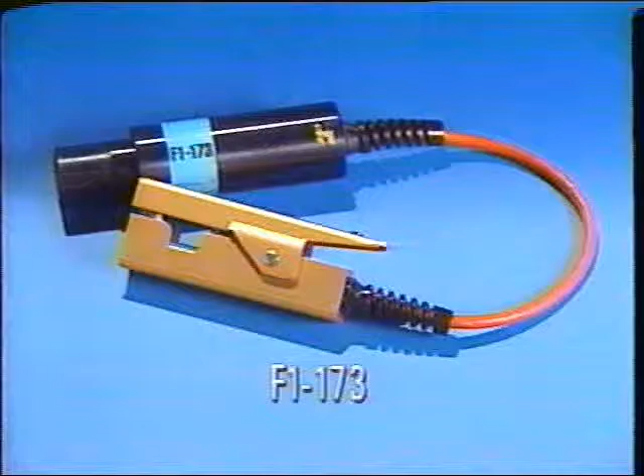3 more adapters will be included with the 13.0 monthly updates. They include the B592 oxygen sensor and throttle position adapter plug, the F1173 dual output for tachometer and distributorless ignition cylinder identification, and D3175 and 176 port 1 and 2 shorting adapters.

A concern is developed in conjunction with the Release 12.5 upgrade that has been installed on your SBDS. The upgrade is incompatible with certain past model vehicles and damage will occur to your SBDS if connected to the self-test connector on these vehicles.

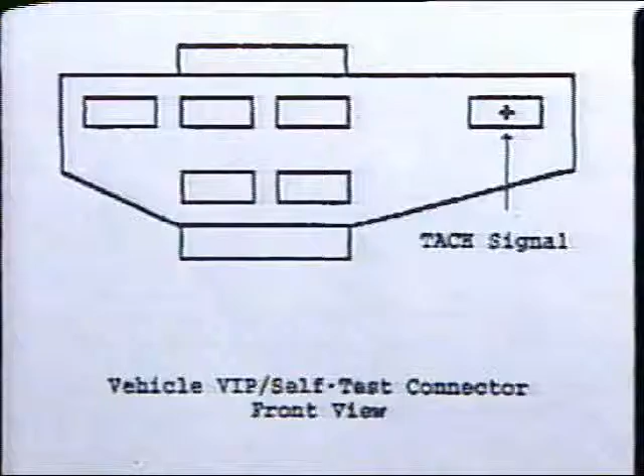1985 and earlier vehicles have a high probability of this problem and should not be connected to SBDS. As a temporary solution, remove and insulate the tach wire from the self-test connector on the affected vehicles. As a further precaution, refer to your latest SBDS tool coverage chart.

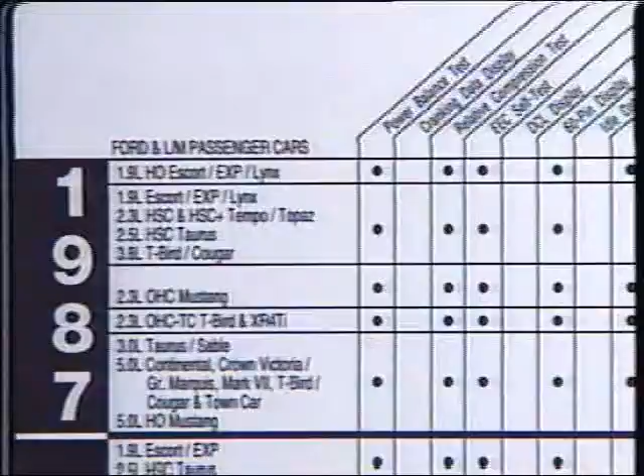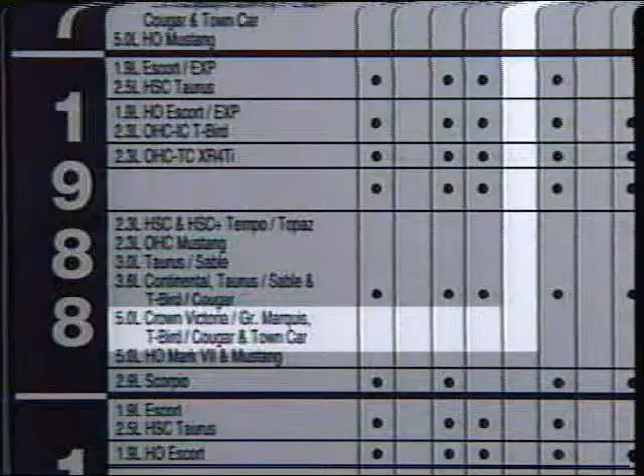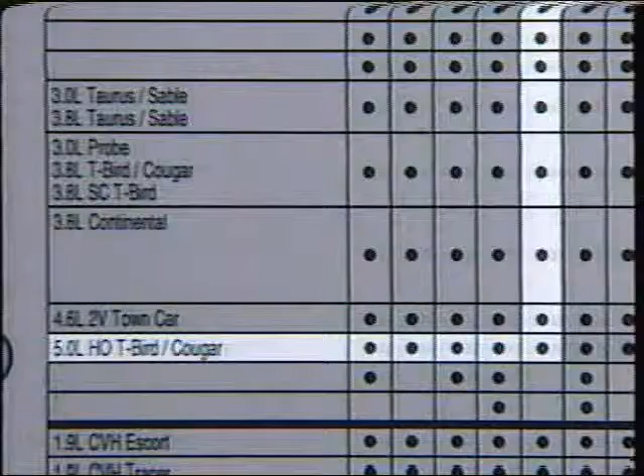If the vehicle you wish to test is not listed or does not have DCL display coverage, like this 1988 5-liter Thunderbird, check the self-test connector for a tach lead. If there is a tach lead, remove and insulate it before connecting to the SBDS. Vehicles with DCL display coverage, like this '91 5.0 T-Bird, will require no modification to the self-test or data link connector.

A long-term solution is under investigation. More information will be released as it becomes available.

The new main menu has replaced the vehicle entry button with a body chassis electrical toolbox button. This button is grayed out or not operational at this time, but will be available for future updates.

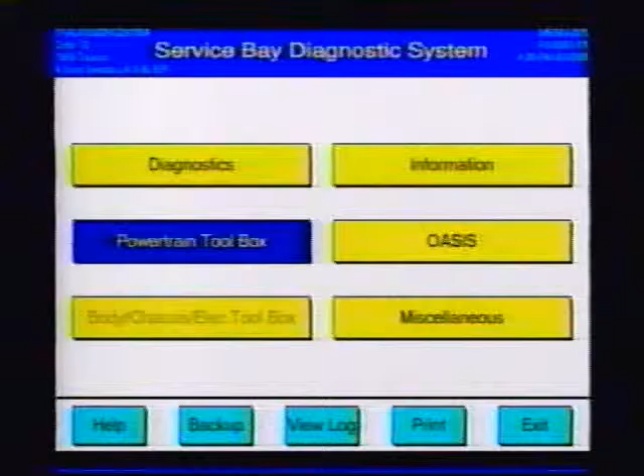If we select Diagnostics or OASIS or Powertrain Toolbox, that is any function that is VIN-driven, we will access a vehicle entry screen. Here we can just touch Continue if the vehicle we want is in the active area, check past VINs to see if the vehicle is in the vehicle file, or type in a new VIN.

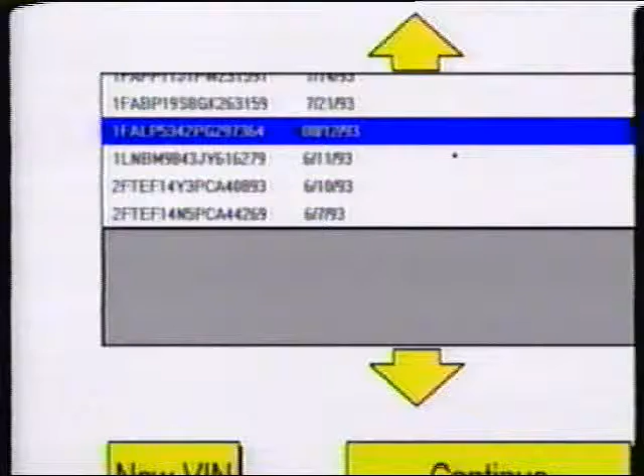Let's look at past VINs. The vehicle selection file can now hold up to 100 vehicle identification numbers, which will stay in the file for 7 days. After 7 days, SBDS will automatically remove the VIN and the associated vehicle log.

If we need to save a VIN in a log for a longer period of time, we'll touch hold and the VIN will now stay until manually removed. If we touch remove for a VIN on hold, we get a removal confirmation screen. Let's touch no. If our VIN is in the scroll box, we can touch continue to proceed.

If not, let's touch new VIN. If there's a VIN or mileage showing, touch clear. This will not remove the VIN from the vehicle file, it just clears the boxes so a new VIN can be entered. Type in the new VIN and mileage. Now let's continue.

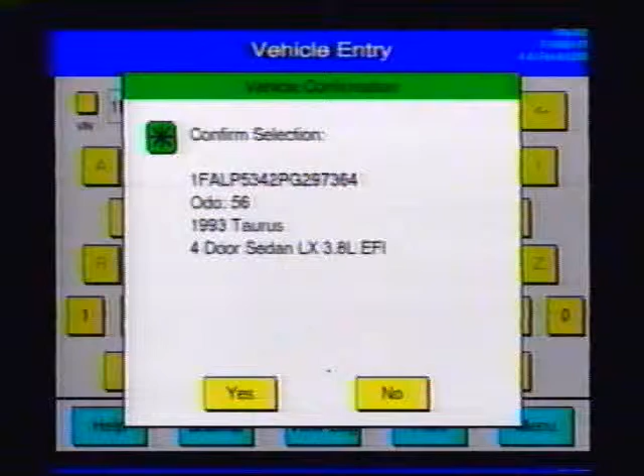Here's the vehicle confirmation screen. We'll touch yes to proceed to the powertrain toolbox. Let's go to a power balance test.

Some hookup screens now look like this, with a schematic instead of text. Help looks different too. In addition to the original 6 help modules, we can now go to the information module from any help menu and access service manuals, calibrations, broadcast messages, technical service bulletins, users information, EVTMs, or even recalls and owner notifications. Let's touch menu, and we're back at the help menu.

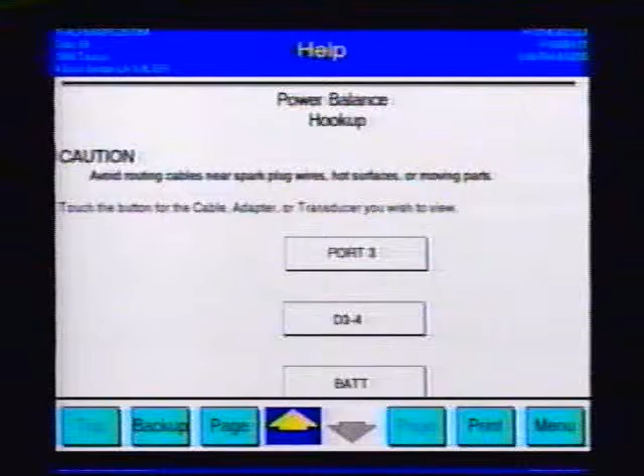Let's select hookup. It now shows descriptions of the cables and adapters shown in the hookup schematic. We've selected battery. This tells us all about the battery cable.

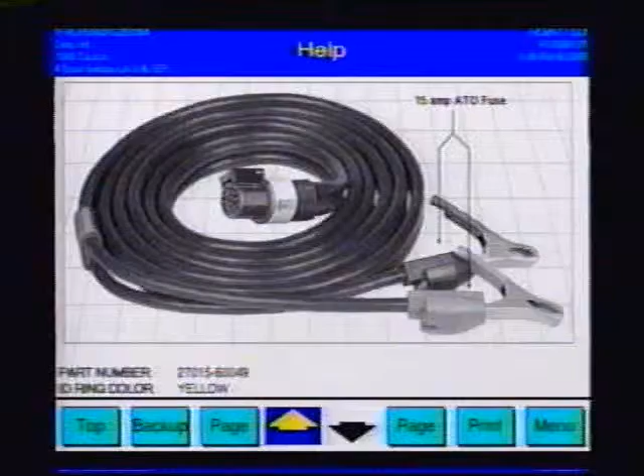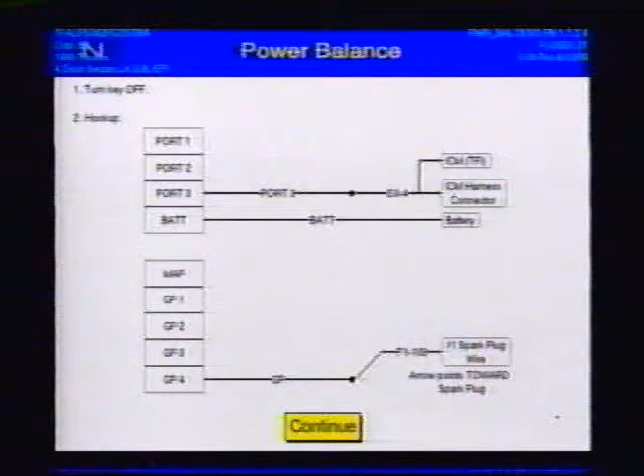Pressing the menu button takes us back to the help menu, and exit returns us to where we were when we entered help. Continue takes us to this screen. This note was in a recent newsletter and improves the dependability of power balance. We can continue from the screen or from the pendant. We'll find several tools now allow continue from the pendant.

EEC4 tests in 13.0 are essentially the same as previous software levels. So let's return to the main menu and select another VIN.

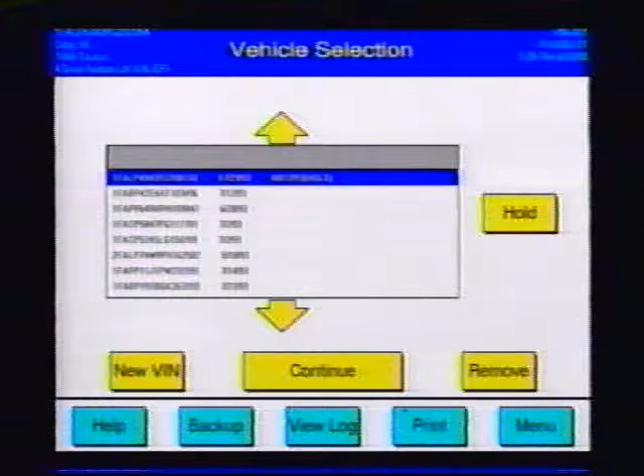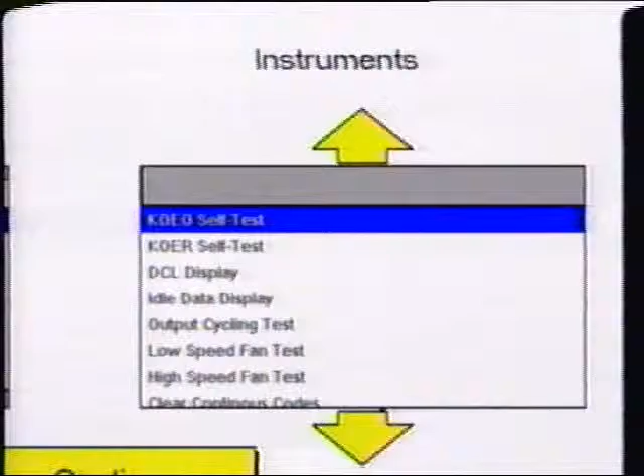This one is a 94 that's in the vehicle selection file. We'll touch yes on the confirmation screen. The toolbox category, electronic engine control instruments, looks familiar except for one new item, PCM reprogramming. We'll come back to this in a few minutes. For now, let's select key on engine off self-test.

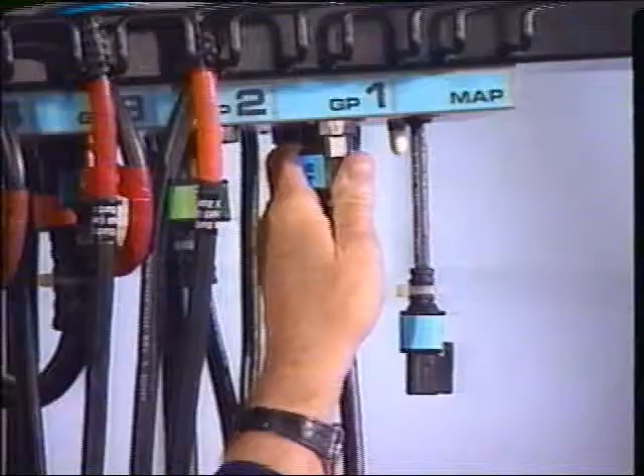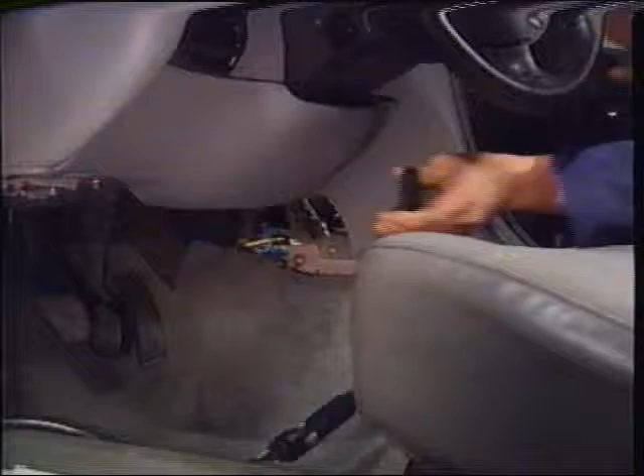We're going to use some of our new 13.0 hardware. First, connect the GPC cable to the boom. Then connect the D373 adapter to the GPC cable. The D373 adapter then connects to the new EEC5 test connector, now located under the instrument panel. This connector conforms to SAE standard J1962, required for OBD2 vehicles.

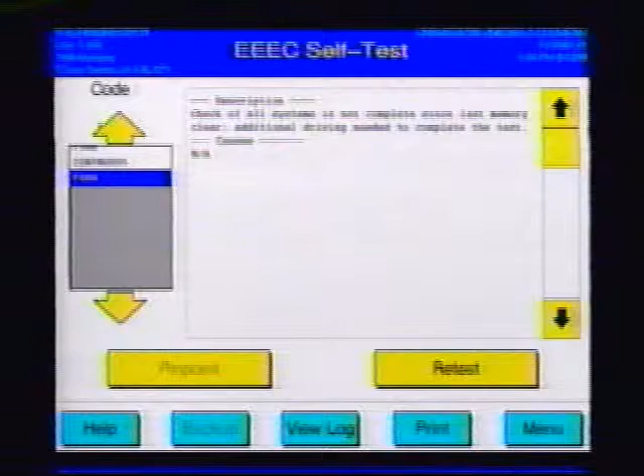We'll turn the key on and continue from the pendant. The code outputs are in the same format as the EEC4. Of course, we use the new 5-digit codes. The P1000 code indicates that a fault is not detected, but all of the OBD2 monitors have not yet been tested. An appropriate drive cycle is required to clear this code.

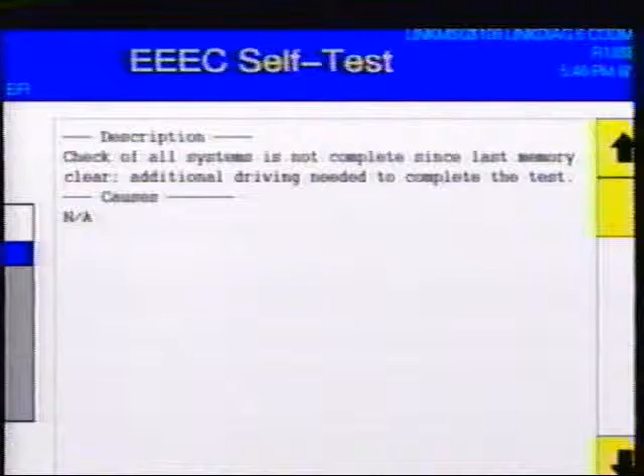Let's return to the powertrain menu and take a look at the new electronic engine control instrument called Powertrain Control Module Reprogramming. We expect this feature will be available on the 13.02 monthly update. The PCM reprogramming tool lets you reprogram the 104-pin EEC5 with an updated calibration. This is done through the data link connector between SBDS and the vehicle. The PCM remains in the vehicle during reprogramming. This tool is used with EEC5 vehicles only.

When we touch Continue, SBDS displays applicable TSBs and recalls, if any exist, for our vehicle. We will proceed only after completing any replacements or repairs called for.

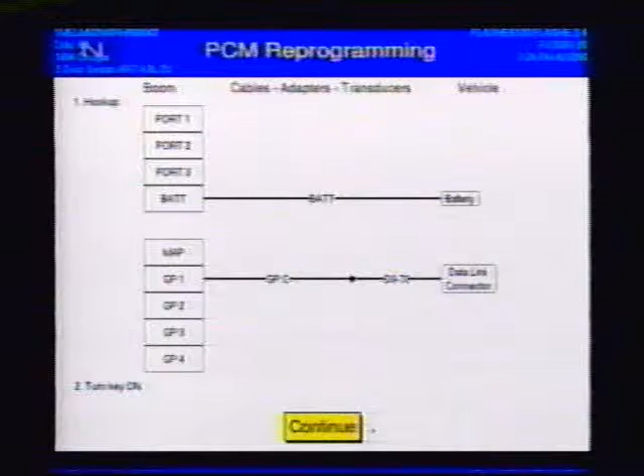We'll follow the hookup instructions and touch Continue. This screen instructs us to remove the regular CD from the drive and install the Calibration Update CD. The Calibration Update CDs will be included as necessary with your monthly update. The timer is displayed during the reprogramming process. After reprogramming, SBDS displays the information necessary to complete the authorized modification label. SBDS then conducts a self-test and automatically prints the vehicle log file.

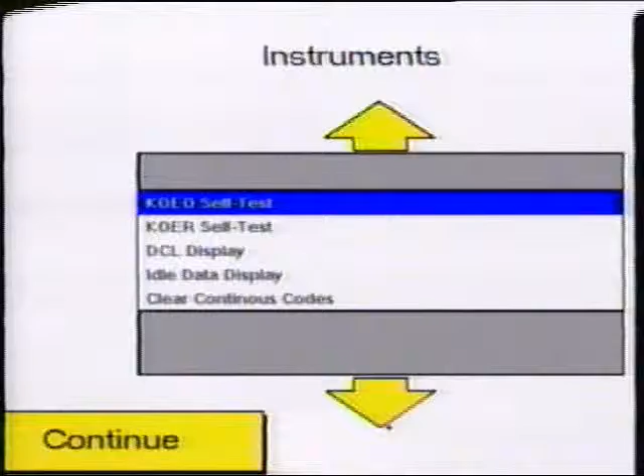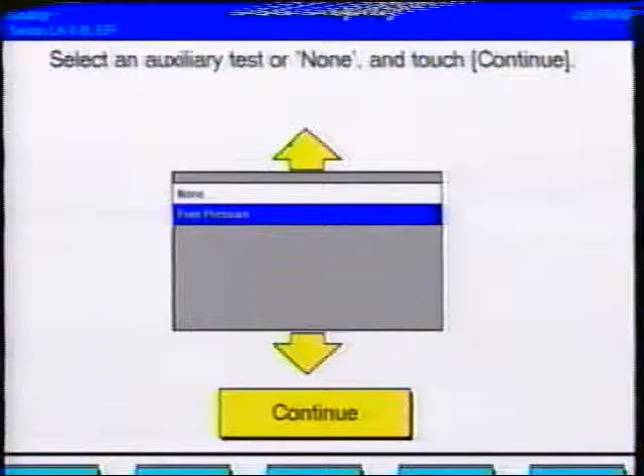Back at the Instruments menu, we select DCL Display. We now have the option of selecting auxiliary tests in DCL Display. Let's add fuel pressure and continue. Follow the hookup screen schematic and continue. This looks familiar. Let's select Table.

The Parameter Select screen has some new acronyms. Also, our update time is faster on both EEC4 and EEC5 systems. The continuous code counter will indicate the number of times an intermittent code has occurred.

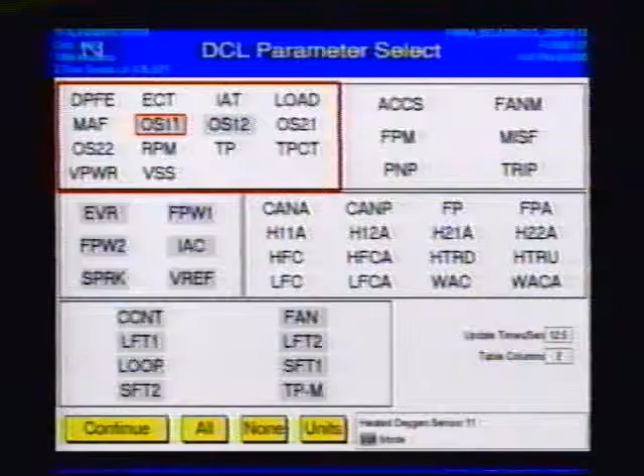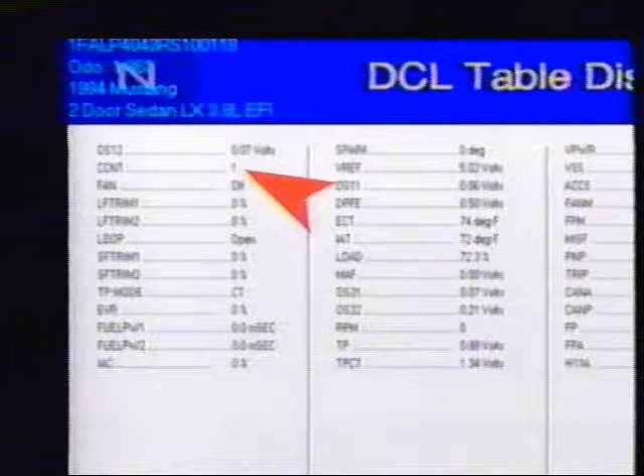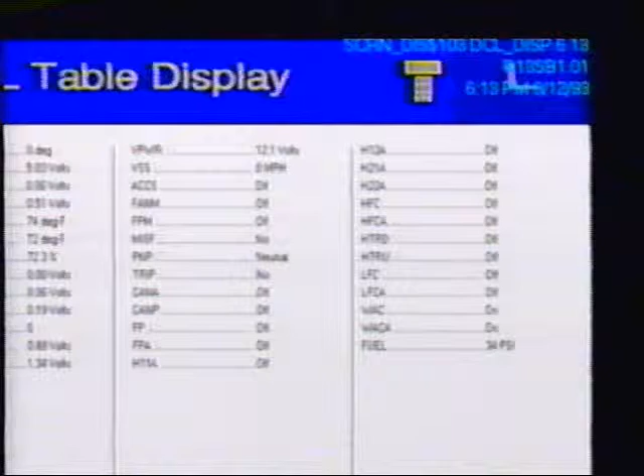Let's look at all the parameters. We see lots of new items. Here's the fuel pressure we selected. Our continuous code counter said we've had one intermittent since the codes were cleared. Up here, we see an L superimposed. This is a new log button that we'll see on certain 13.0 screens. There's also a road test button, so we can go directly to DCL Recorder and Monitor.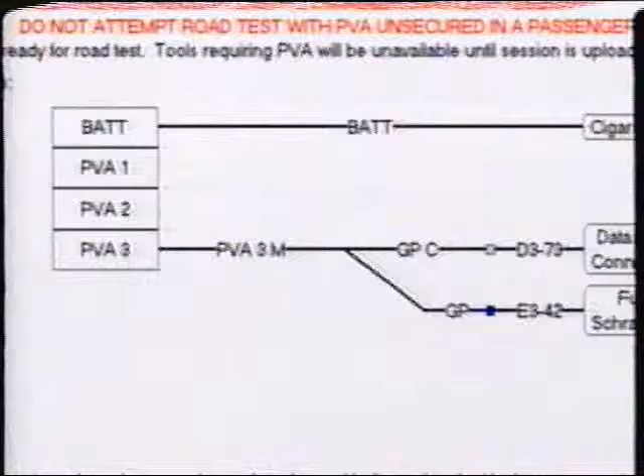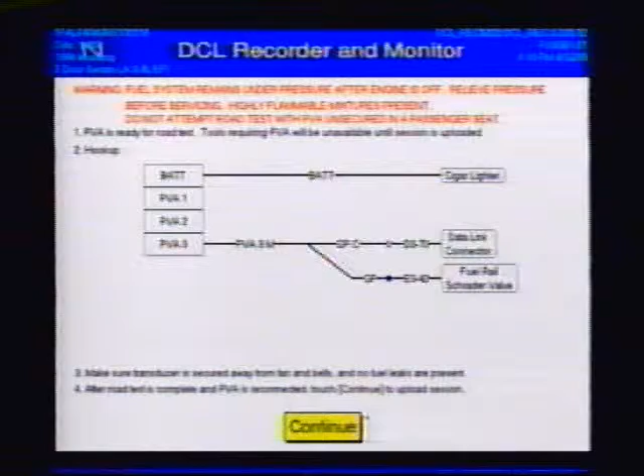The items we've selected will be automatically downloaded to the PVA, and we'll get a new road test hookup screen. Notice that we'll be using the new PVA 3M mini road test cable. DCL road test procedures are similar to 12.0. When we return, continue will upload our recording. Or if someone has used SBDS for information while we were road testing, we could select road test and upload session from the toolbox menu and touch continue.

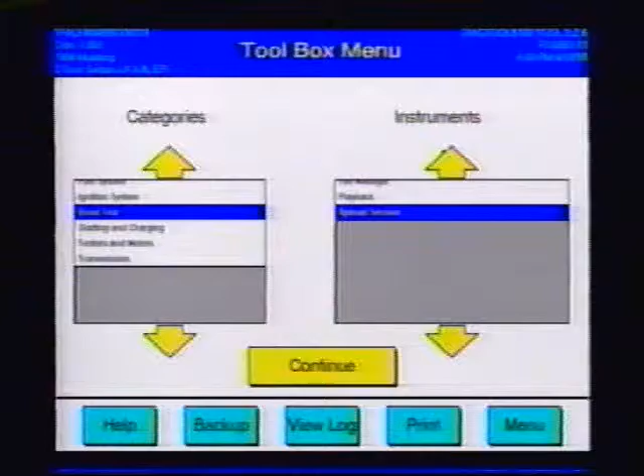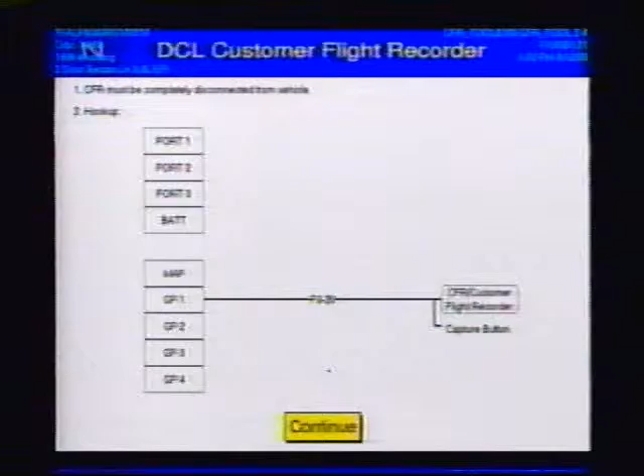We have some new features in the 13.0 recorder tools that are accessed through the data link connector. They include the transmission DCL recorder monitor and the transmission customer flight recorder. Let's use DCL customer flight recorder as an example. Here's the hookup screen showing the connections. The parameter select screen has the same items we saw in DCL display with one difference.

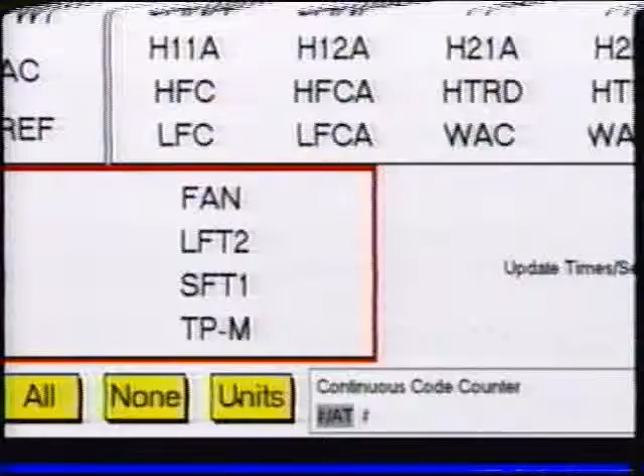If we highlight CCNT, continuous code counter, we see that the units button is active. We should select pound AT. In playback, it will show us the number of codes set, and the AT will provide auto trigger. If a code is set, capture will be triggered automatically. All continuous codes should be recorded and cleared from the PCM before connecting the recorder. This will assure proper operation of the CFR.

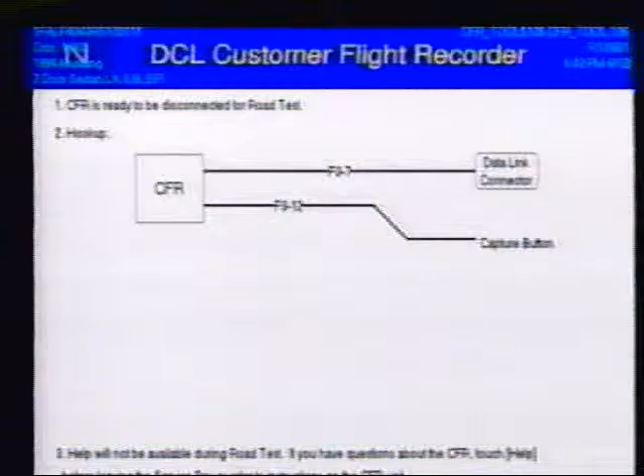The hookup screen shows the new J1962 CFR cable, F37, that we need for EEC5 vehicles. Now we're ready for the road test. During the road test, we observed that the red light came on without pressing the capture button. This indicates an auto capture.

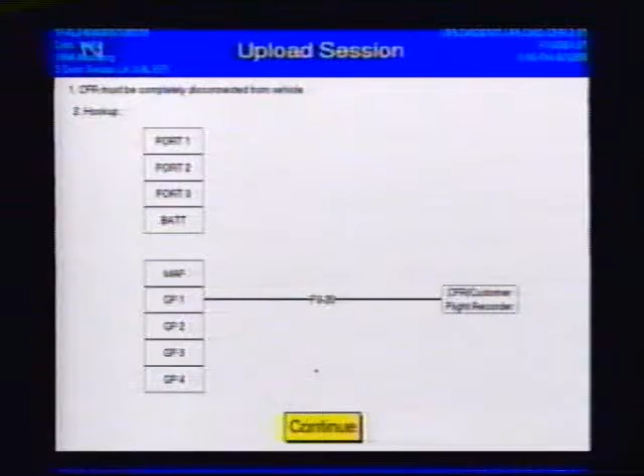Back in the shop, we select road test and upload session from the toolbox menu. Here's the upload hookup. We need to name the recording, and here's the playback menu. Let's select graph.

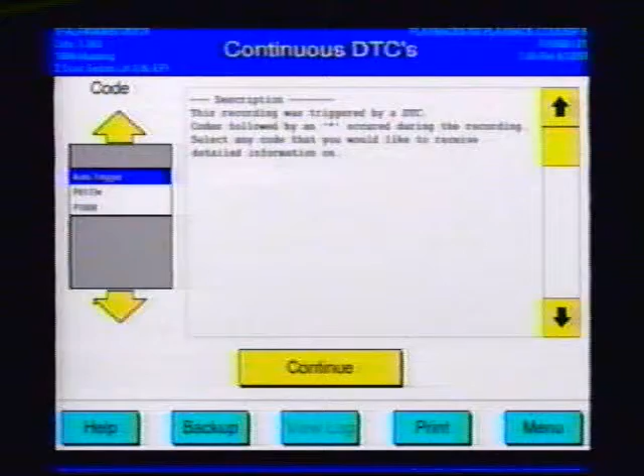This is a new screen. Notice the code box indicates the recording was captured via auto trigger. If we had captured the recording manually, the code box would indicate manual trigger. The asterisk indicates that the code was captured during the recording period. Code description identifies the IAT sensor circuit.

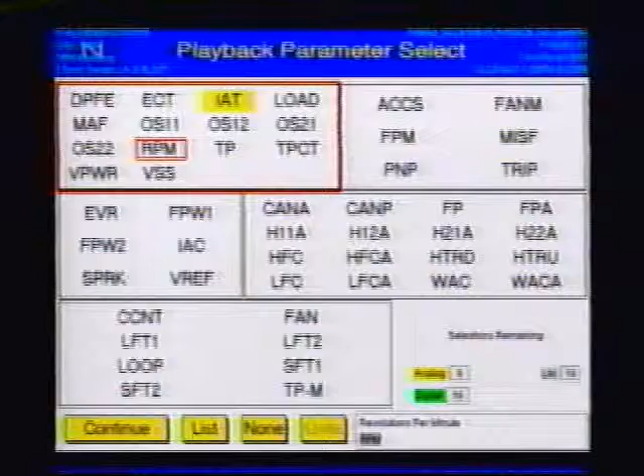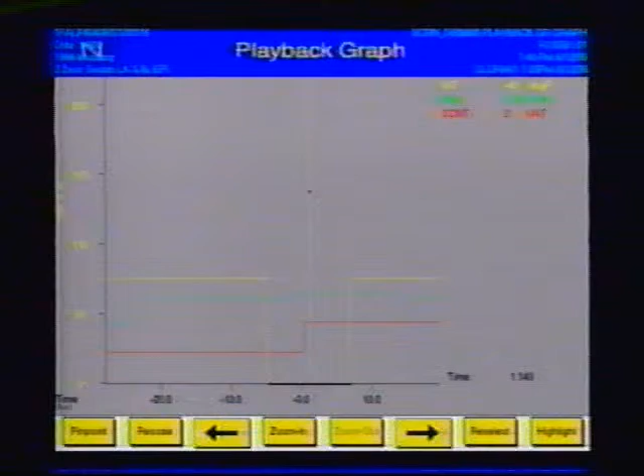Since we identified the IAT as a cause, we'll select that parameter along with RPM and CCNT. We had selected IAT degrees, so the graph went low when the circuit opened up. Here's where the continuous code counter tripped. As we move the cursor across the trip, we see the counter go from 1 to 2. The 1 count is for the P1000 code, drive cycle not completed.

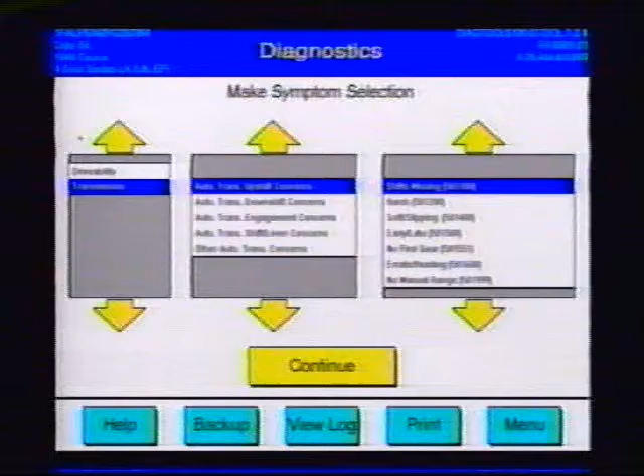Now let's select Diagnostics from the main menu. With Diagnostics, we still have our various drivability concerns and drivability symptoms. In addition, we can now select Transmission. Each one of the concern selections in this window gives us an expanded list of appropriate symptoms.

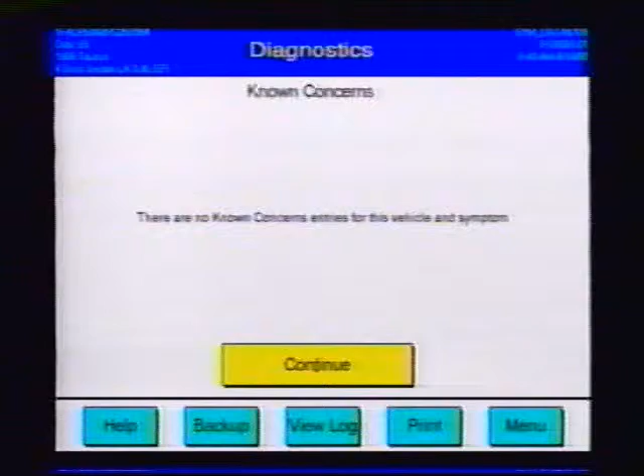Let's use Upshift Concerns Harsh. Here's our visual inspection reminder list. And we also get a listing of known concerns if there are any. This brings us back to the Diagnostics menu. We still have the option to skip around in categories if we want to, or follow the automated diagnostics path for instruments. Of course, all the diagnostic instruments are tools available in the Toolbox module.

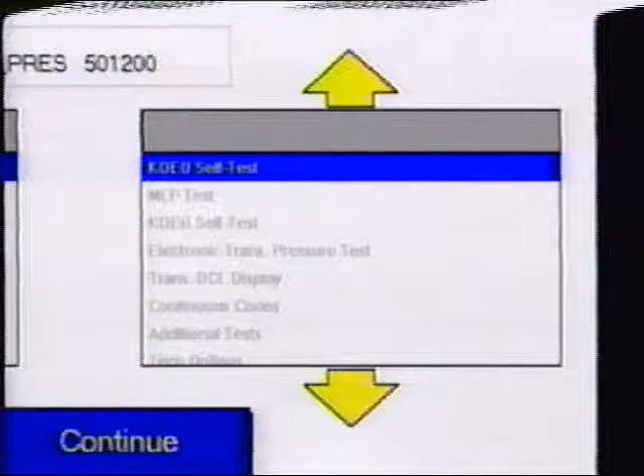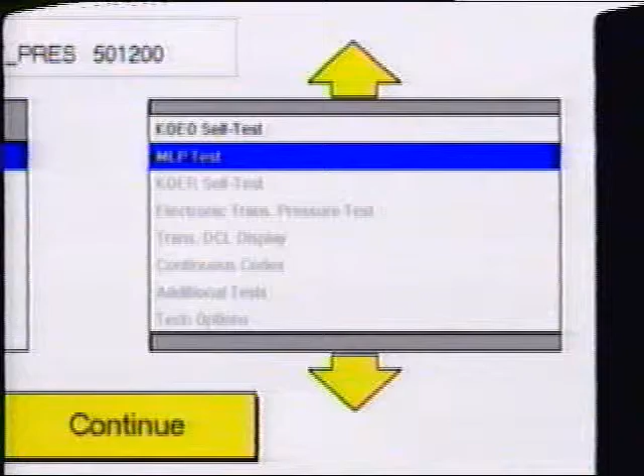Let's look at the first two. Key on, engine off should be our first test, and any faults indicated should be repaired. Key on, engine off shows passcodes, so we'll touch continue. This will move diagnostics to the manual lever position test. MLP test is a new tool available for 13.0 and can be accessed in Powertrain Toolbox as well as Diagnostics.

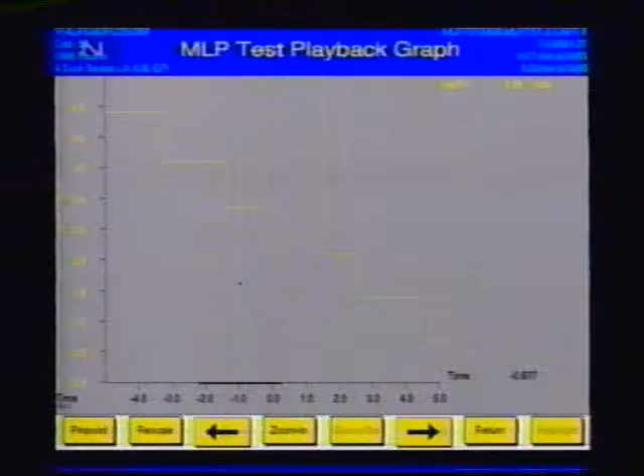A wiggle test could locate the cause. Return takes us back to the test screen. After retesting the repair, we'll touch Menu and return to the Diagnostics menu. Since it was located and repaired in the MLP test, we can touch Menu to exit Diagnostics and verify the repair with a road test.

Here's another look at the F1173 dual output transducer. It's expected to arrive with your 1302 monthly update and will replace the F1100 adapter. There's no directional arrow on this adapter, so it can be attached either way to the spark plug wire. After you install 1302 on your SBDS, the F1100 will no longer work. Watch for disposal instructions for the old adapter.

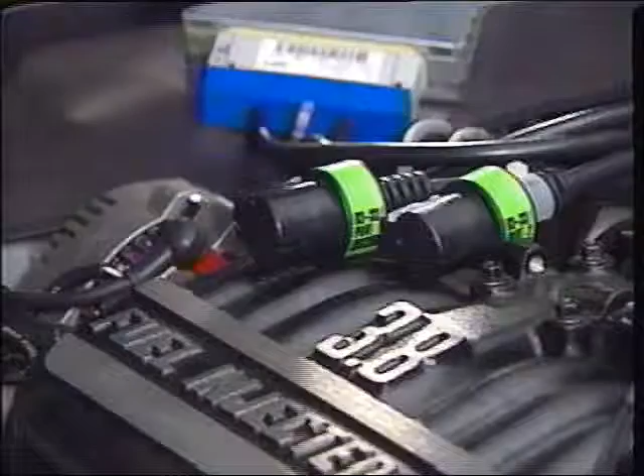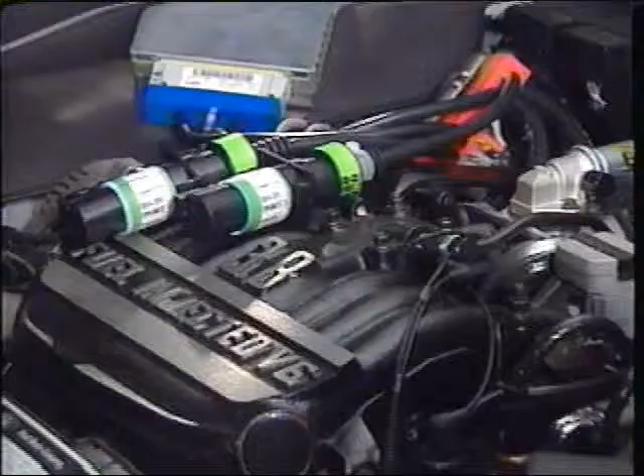Included with 1303 will be these D3175 and D3176 shorting adapters. Install these to the port 1 and 2 plugs of your D333 60-pin adapter. Once installed, these adapters should be left on your D333 permanently. With these adapters in place, you'll be able to run the car with the port 1 and 2 cables removed from the D333.

The B592, which will come with 1301, and the B593, B886, and B887 that came in your 13.0 package will be used with new pinpoint tools as they come online. The 13.0 update also provides added vehicle coverage for the relative fuel delivery test on EFI or bank-fired injector engines.

It adds 2.3 dual-plug engines to the EI low data rate DIS ignition system tests. 13.0 provides road test recording capability with both DCL recorder monitor and a customer flight recorder for the Villager through the data link connector. For EEC4 vehicles, the 60-pin recordings now have pinpoints on playback, and additional information is provided in various help modules. Be sure to review the new user's guide. It's been completely updated. For example, there's a different diskette drive cleaning procedure in the maintenance and care section.

The 13.0 package is another big step in the evolution of SBDS. With all the enhancements of SBDS, and with the advent of OBD2 or EEC5 on some of our new cars, there's bound to be questions. Remember that the Support Center is there to help.